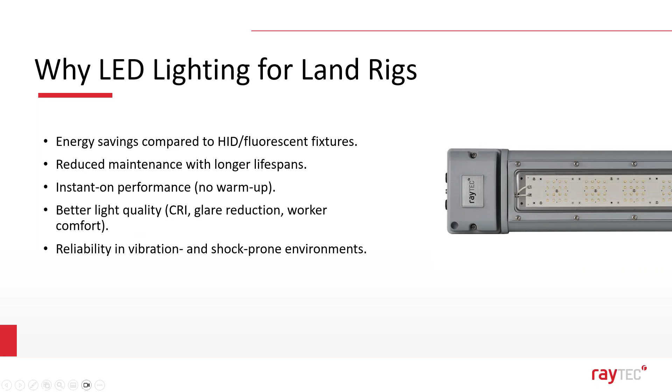And finally, one of the key aspects that we're going to discuss about land rigs in particular is they're very prone to high levels of vibration. It's inherent in the process. So therefore, anything that's attached to a land rig, anything that's operating with the land rig, is operating in a very high vibration environment and shock environment. And this obviously has impacts on what we use in those areas.

On a land rig itself, there are many key application areas. These areas have to be properly lit at all times. These would include the engine room, the mud room, diesel tank areas, mixing systems, the workshop areas, and the accumulators. All of these need to be lit properly at all times.

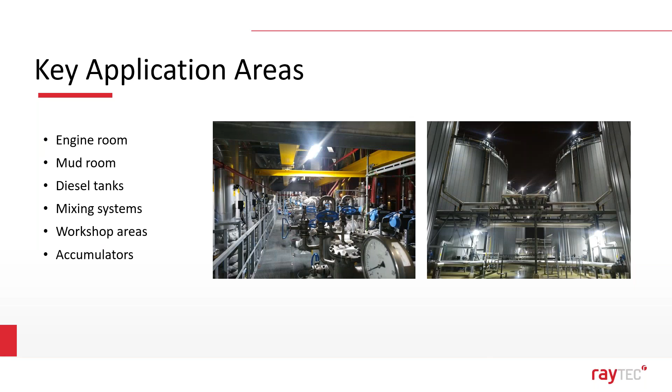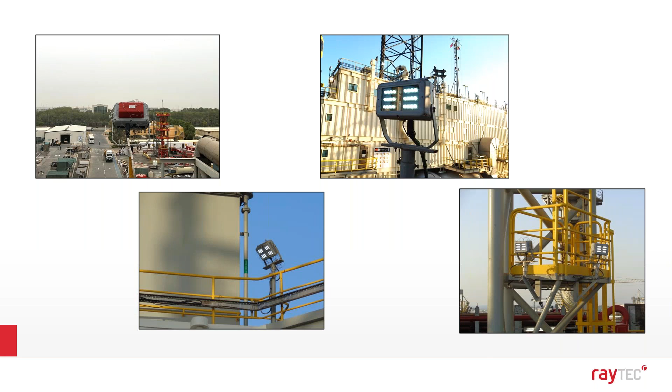On these pictures here, you can see some onshore pictures of various spotlights that we've got in locations with a safety net around them. For retention, there's a secondary retention cable on there as well. So you can see in terms of the fixing, clear visibility, no obstructions, providing a good level of light.

On this next slide and picture here, you can see an example of a hydraulic workover rig out in UAE. You can see there the different levels, and on each level we've got lighting, and lighting illuminating any staircases, all of which needs to be consistently running at a high level without any obstructions.

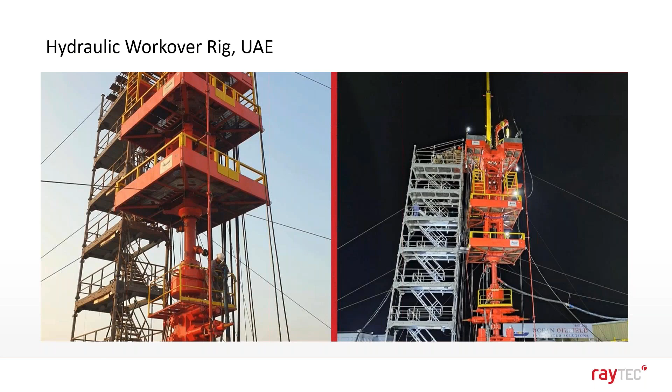Now, as we mentioned on earlier slides, safety and compliance is a very important, dare I say, critical feature of any land rig operation. All of the electrical products, and especially in terms of the lighting, which we're talking about today, have to be explosion-proof, flame-proof certified. So you'll find the certificates for all of our products for IECEx, ATEX, etc., all listed and available on our website.

Another important aspect of the safety and compliance working on land rigs is emergency lighting, which we'll touch on in the future. Land rigs are operated by diesel generators. If there's any issue with a diesel generator, the power goes off, the emergency lighting has to kick in in order to provide either conditions good enough to continue working and processing, or provide the correct lighting conditions for a safe evacuation of the site. So emergency lighting is a critical part of land rigs and land rig safety.

In terms of other aspects where we have to comply and make sure we provide a safe product, we're going to talk about and look at IP ratings and IK ratings. And as we show there, IP ratings are the ratings for a product in terms of the protection that it gives against dust and water. Ingress protection, this is why it's called IP. Likewise, we have a similar rating called IK, which is for impact protection. And what we're going to be doing next is just having a quick run through of what the ratings mean and how they come about.

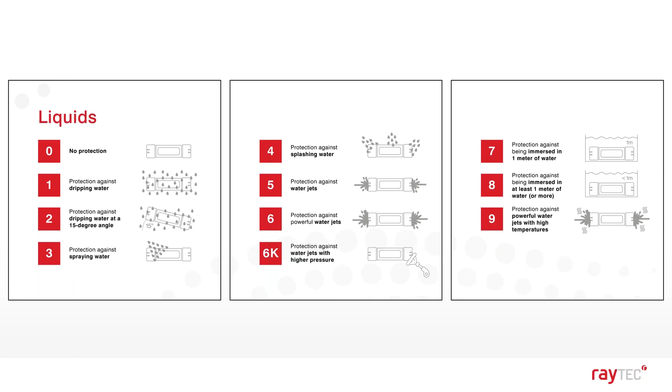There is a similar style and chart and understanding to the IK ratings. The IK impact protection rating goes from 0, with 1 being the lowest form of protection, which the certification states is 200 grams dropped from a height of 7.5 centimeters onto the object, giving an impact of 0.15 joules, all the way up to the highest classification, IK10. This is a 10-kilo object dropped from 40 centimeters, giving an impact of 20 joules.

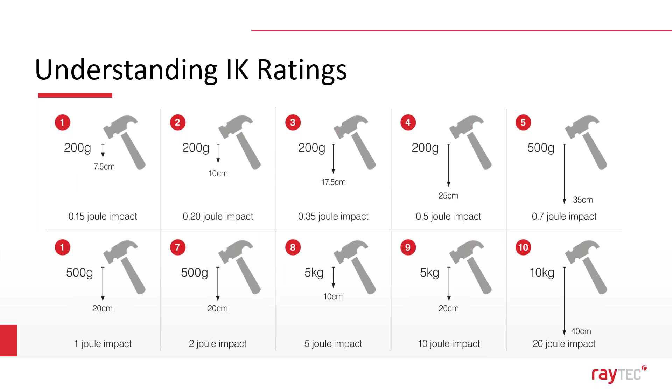Now, this is all a little bit hypothetical and theoretical at this stage, but we've got some practical examples coming later on in a video, which will give you a bit more real-world understanding of what we mean by the IK ratings and what type of forces we're talking about.

Now, the challenges and solutions about land rig operations are multiple. It considers many different factors. So we're going to run through some of them now, understand the challenges, and then understand some of the solutions that can be employed to provide a better and safer working environment on land rigs.

As we mentioned earlier, land rigs can be located in many different locations, but by and large, many of them are pretty harsh environments. There can be extreme temperatures - for instance, in the Middle East we see very extreme temperatures, and I'd imagine there are areas of North America with very low temperatures on land rig locations. Natural phenomena, depending on hot or cold, can include snowstorms, sandstorms, and anything in between, probably along with high winds in many instances.

Chemical attacks - often many of the chemicals used in processing on land rigs can be extremely aggressive. This can affect anything they're splashed or spilt onto, or come into contact with, along with chemicals that maintenance teams use when cleaning land rigs. Land rigs are often disassembled, reassembled, and moved elsewhere, and during this, cleaning processes occur where various chemicals used can degrade light fittings.

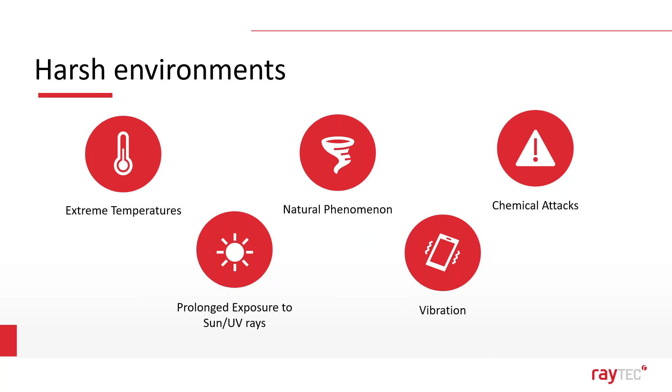So what do we look to do at Raytec in terms of providing products with suitable solutions for use on land rigs? Well, firstly, all of our lighting enclosures, all of our luminaire enclosures, are made from high quality marine grade aluminium. This not only provides a very strong, rugged, durable enclosure to house the LEDs in, it also helps keep the LEDs cool, which is extremely important for longevity and optimum performance.

On the front of the luminaire, shown in the picture on this slide - this is a linear - the lens we use is a UV stabilized polycarbonate lens. We do this to provide huge amounts of impact resistance. And as you'll see later in the slides, with a polycarbonate lens fitted, we can achieve an IK rating of 10, 10 being the highest possible on the certification scale.

As mentioned before, all of our products are ATEX, IEC EX and UK EX compliant, along with American standards as well, all of which are listed and available from our website. And quite obviously, to match the certification levels, our products are IP66 and IP67 rated on certain products. So please check the exact data sheets, please check the website to understand the location you're looking for, and it will show what IP ratings we have for those products.

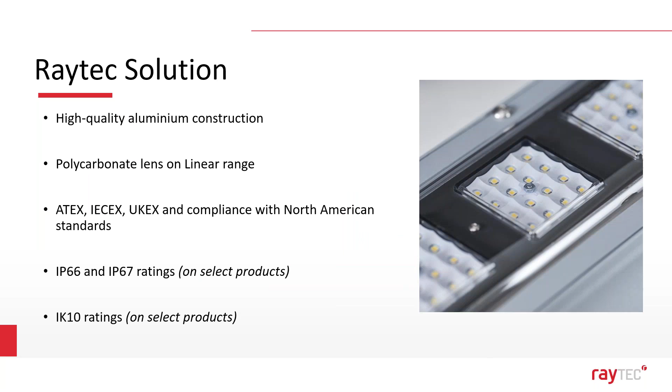One of the points we raised earlier was the difference in power consumption between traditional lighting and LED lighting. We've already discussed that traditional lighting is extremely energy intensive in comparison with LED lighting. This is going to bring about higher operating costs. And what do I mean by higher operating costs?

As we've already talked about, land rigs are powered by generators, which by and large are diesel generators. Now, in many instances, the extra cost of a bit more diesel is negligible, not a high cost in the overall scheme of things. However, because the land rigs depend upon the diesel generator system to provide the electricity, challenges are that the generators can get overloaded. And if the generator goes down, the emergency lights kick in, and then there's potential for delays in the processing, and this can be very, very costly.

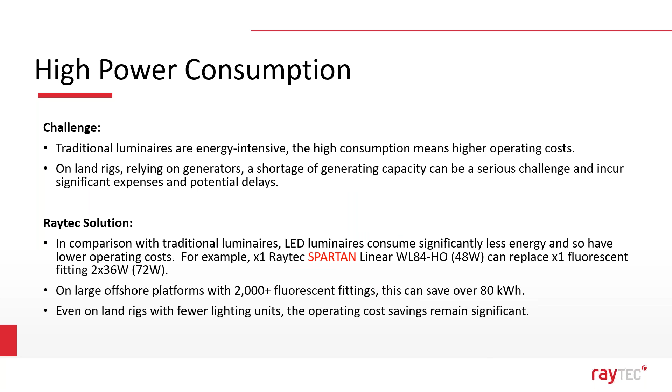Hazardous waste. Well, what's that got to do with it? Many people are going to ask. Well, we said that land rigs are pretty much always located in hostile, harsh, difficult to reach, remote locations. Not in every instance, but in many instances, this is the case. That means traveling to and from a land rig can be very time consuming and can be costly.

That means if you have to start disposing of everything, this is also going to be a cost that comes into it. But most importantly, one of the key differences between traditional luminaires and LEDs is the fact that traditional luminaires may contain mercury. That makes them hazardous, which means the disposal can't be a regular disposal. It's more complex and more costly, because staff have to be trained about how to handle, how to store, and when to be able to safely dispose through the correct disposal process channel.

And given that many of these land rigs are a long distance away from the base, this is going to be costly. In comparison with LED lighting, where there's no toxic content, no special handling is required, anything that does need to be disposed of can be disposed through the normal, general, proper recycling process systems that are available.

Another key challenge is maintenance. One of the things we've done with some of our distributors is get the chance to talk with chief electricians on various land rig operations. Pulling together the information from talking with them, we came up with 6 pretty common lighting related issues that they all seem to experience and want to find solutions to.

The first one we heard of was frequent maintenance. Relamping, ballast failures, things like that - this takes an awful lot of time and effort in terms of having to uninstall, tag out, and reinstall new units.

Lens damage. Especially when the land rigs are put up, assembled and then disassembled, there's often instances where lenses get cracked or break during this process. But we've also heard that lenses get cracked and broken due to prolonged UV exposure.

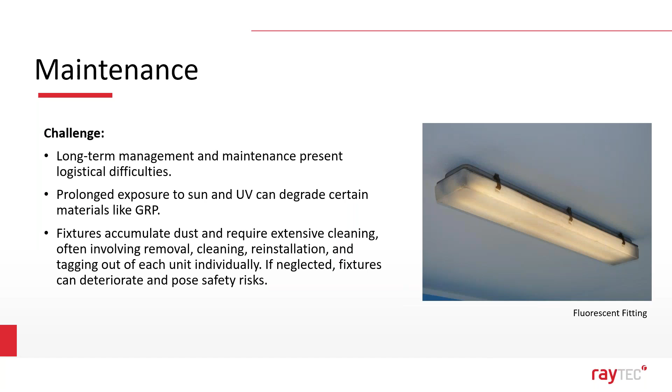And the heavy, dusty, dirty environment means there's often maintenance cleaning going on, and the maintenance cleaning takes time to clean, reinstall, tag in, tag out, and replace any damaged fixtures if necessary. If they're not creating the light where it's needed and there's a gap in the safety lighting, it's a problem that needs to be fixed straight away, and that can lead to delays in processing times. So how do we look at that from Raytec's point of view?

We were talking about dirty diffusers and dirty lenses and what we can do about that. The obvious thing is to clean them more regularly, but if you clean them more regularly, there's a maintenance cost and a time issue involved. And various cleaning agents can damage the lenses, scratch them, which leads to longer term reduction in light quality.

So one of the things we offer from Raytec is removable protective films - clear optical films applied to the front lens of the linear unit, very quick and easy to apply, literally stick on, and likewise very quick and easy to replace. You just peel them off and stick a brand new one on. So when the linear light has got too much dirt and grime, and constant wiping with a cloth over the removable film still isn't making the light clear enough, you simply peel it off and apply a new one. Not a perfect solution, but a very fast, simple, cost-effective one.

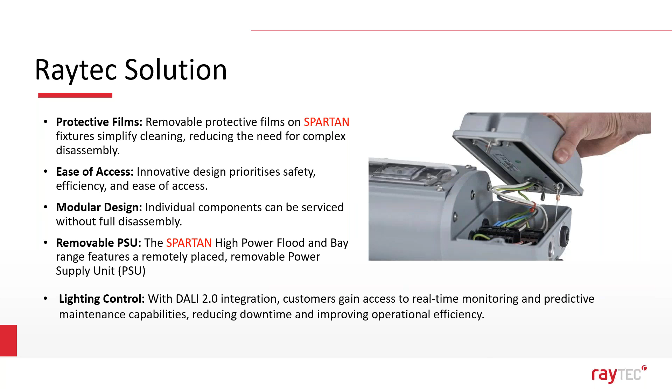Skipped a slide there, my apologies. So what we've got here, this is not real life, okay? This doesn't exist on a land rig. This is a factory bench situation, so it's not real life. I wouldn't worry too much about focusing on the speed that this video is going to show. What I would focus on is the actual ease and simplicity, making maintenance easy. How fast can you change a power supply on a Spartan Linear? Well, let's find out and see.

Power off. We undo the 2 bolts retaining the cover. Disconnect the power cables, disconnect the earth wire, remove the retention cable, reattach the retention cable, reattach the earth wire, reconnect the power wires, resecure the lid onto the main body, and switch the power back on. 2 minutes dead.

Okay. Now we understand that's not real world. That's not real life. That is just an example of how simple and easy it is to replace the power supply unit. Obviously, in real life, it could be suspended in a different position and could take much longer. But it's a very simple process, and it doesn't involve opening up the whole of the luminaire.

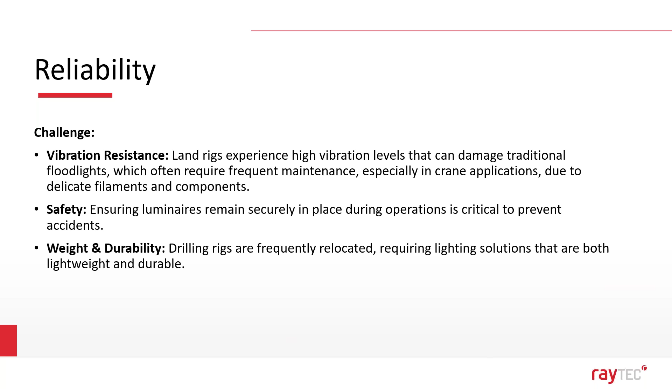Weight and durability. As we said, drilling rigs get assembled, disassembled, moved to different locations on a fairly frequent basis. All of this means the potential for damage is quite high. So we don't want things to be too heavy because we've got to transport that rig from A to B. But it needs to be very, very durable, because during that process of assembly, disassembly, operation and transport, there's always a chance that something is going to get damaged.

So how do we look at that? Well, as I said before, the nature of LED lighting means that it's more inherently resistant to vibrations. Not having the filaments means that already it's going to be a better bet to last longer in high vibration environments.

Crane luminaires, as I mentioned, have got special dampers fitted to ensure longevity in those situations, and all of our luminaires are fitted with secondary retention points. What you'll find is some of our distributors fit these as standard on everything that they sell. You need to ensure that should a fitting come loose, it remains attached at all times and doesn't drop, causing a hazard to the workforce.

And as I mentioned earlier, the aluminium bodied LED lights that we produce are often lighter than some of the traditional lighting, and they're very tough and durable in terms of the design, and we achieve an IK10 rating on those linears. So in terms of, are they going to last? Well, the answer is yes, they're going to last.

As we were talking about emergency and safety situations, one of the points we touched on earlier was about safety showers and the safety shower location and what we can do to assist with that. So we do have a green light safety shower linear. This has all the usual IECEx and ATEX, etc. approvals, Class 1, Div 2, ABS, UL, CSA, all the different approvals on this.

Temperature-wise, it's going to be able to cope with aggressive and harsh temperature environments, either very cold locations down to -40 or much hotter locations up to +60. So those lights are available, and one of the questions that we had in an earlier session was, are those lights available in a low voltage version? And just to cover that answer off in this session, yes, they are.

So there are low voltage versions available for this green shower light, either in 18 to 48 volt AC or 18 to 60 volt DC. So yes, those are available, and having a well illuminated safety shower area is a critical part of worker safety on land rig operations.

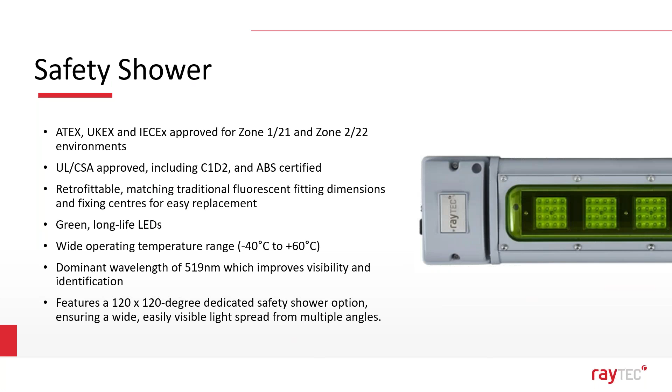Now, touching a bit on what we were talking about on hazardous waste, one of the things that we're very conscious of at Raytec is sustainability, and not having anything hazardous within our products, we think is a key part of our sustainability. But along with that, I just want to share with you that Raytec as a company is carbon neutral and has been certified as carbon neutral for several years now.

Internally, we've got a sustainable planet team that are constantly looking at new innovations and new ways to make sure that anything and everything we do within our business, we can be showing that we're carbon neutral and reducing our output. We've also engaged both locally and further afield on reforestation programs and sustainability drives.

And just recently, we've got our Spartan Linear luminaire EPD certified. So that's Environmental Product Declaration certified. So if you want to check on the website, you can find the latest certification there, just to demonstrate and show how recyclable our products are.

And whilst for some people this may not be a pressing situation right now, we are going to see in the future, even for the land rig operators, that being able to demonstrate that the products being used are sustainable and recyclable is going to be a key feature.

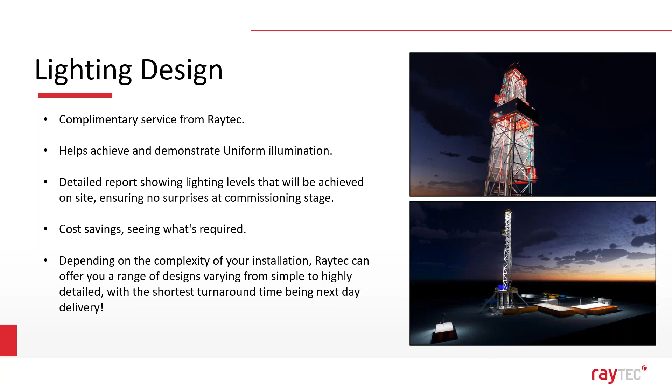So depending upon how complex the land rig or your particular project or installation is, it's going to really depend upon how long it's going to take us to come up with that design. It can be a very simple design, could even be next day. But if you have got some files that you can share with us, then we can create a lighting design for you, for your rig, to demonstrate and show that it meets the requirements that you have for the project.

It meets the safety requirements, and perhaps if your land rig has got traditional lighting on, we can demonstrate the difference in terms of numbers of fittings used, consumption costs, etc., the difference between traditional and LED luminaires.

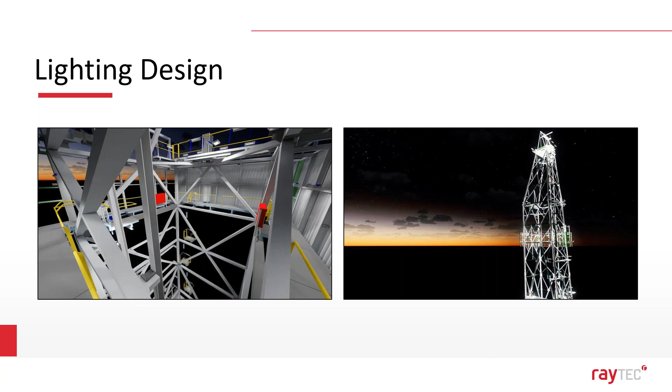And finally, future trends. What are we hearing? What are we seeing? What do we think will happen in the future regarding lighting on land rigs? Well, probably one of the main things we're hearing right now is this move towards having what's called rig crown lighting. You can see from the graphics there, this is where at the very top of the land rig tower, an array of usually high output floodlights are used to illuminate the total operational area. Now, this is to reduce the necessity to have tower lights installed around the installation area.

This is not to take away from the fact that the land rig itself needs to be properly illuminated for processing and safety purposes. So the purpose of the crown rig lighting on the very top there is to illuminate the general area surrounding the land rig.